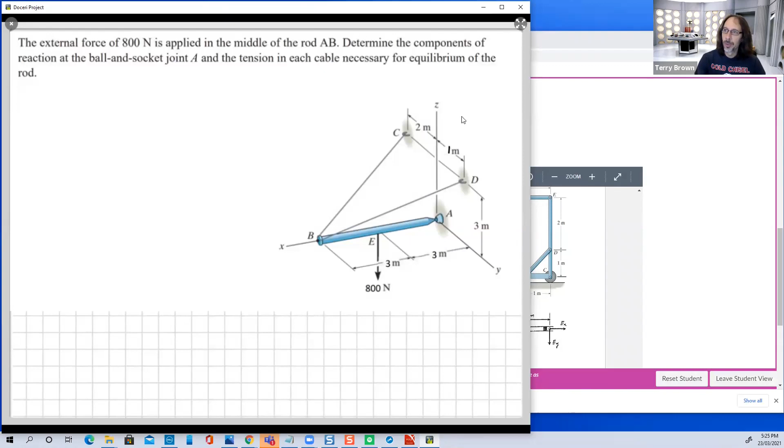All I did was change, where you've got this 1 here, I changed it from a 2 to a 1. Otherwise it was trivially simple.

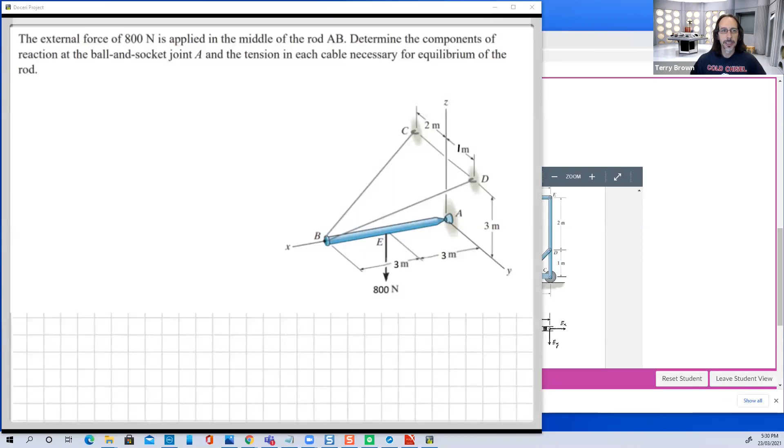Yeah, good thinking. AB a 2-force member? Okay, yeah, Nicholas says it can't be a 2-force member because it has a force applied in the middle. Looking at this, you might be tempted to think it's a 2-force member, but because we've got this force applied in the middle of it, it's not a 2-force member.

If the force was applied out here at B instead of E, if we apply the force out here at B, then yes, it would be a 2-force member, because we would only have forces applied at B and A. But in this case, the force is applied somewhere else.

All right, so I think the other thing was BC and BD being 2-force members. Yeah, these are cables. BC and BD are both cables, so we're going to know the direction of the forces in those cables.

Yeah, so thinking about the reaction forces here, I think we're looking at A. I think it's told that we have a ball and socket joint at A. If we have a ball and socket joint, the thing is free to rotate in any direction around that point, but it can't move away. So no moment reactions at A, but 3 force components.

All right, so what kinds of approaches to solving this problem? It's obviously an equilibrium problem, so we've got to use some equations of equilibrium somewhere. What other things might we be thinking about making use of?

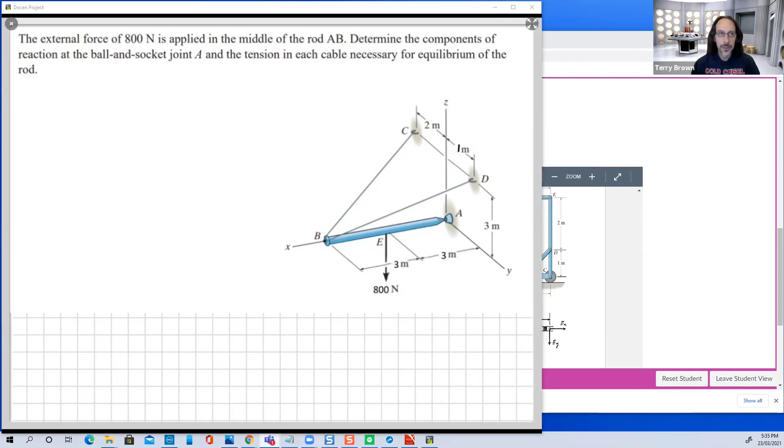And I've posted in Teams, by the way, let's go to Teams, where's Teams? Right here. Moment about y-axis at A. Yeah, that's a good suggestion. I think I did something along those lines.

If we go to general and in post, you can see Fatma's uploaded her solutions to the tutorial problems and also some final exam problems from last year. I've also uploaded my solutions to questions 1 to 5 on Canvas, and I think the original ones that were there were the other tutor Mobarak's solutions.

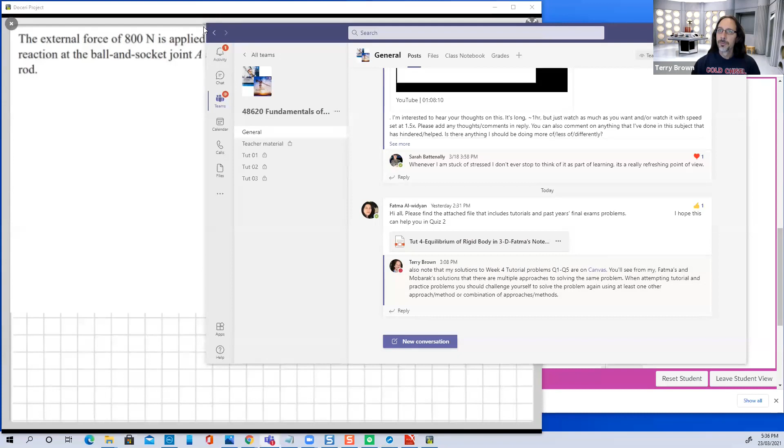And if you look at them, they're all different, all 3 are different, but we all come up with the same answers. So in most problems, there's more than one way to solve them. In those simple 2D equilibrium problems, usually they all take the same form and look pretty much the same: draw a free body diagram, take moments about a point, use the moment equation, then use the two force equations. Most solutions look much the same. When you get to 3D problems, there are many more options for how you solve the problem.

What I've suggested to you here in the Teams chat is whenever you do these problems, try and force yourself to do the problem again using a different method or approach, or using a combination of what you've done and something else.

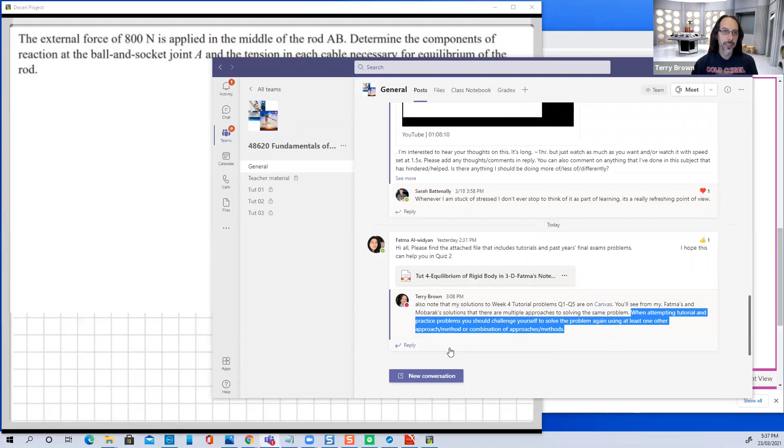Let's see what I've done here. You could do this problem without drawing a free body diagram because it's pretty simple, and a lot of people would draw on the question when doing solutions for quizzes. But if you're doing a problem like this from scratch in a design exercise, then you've got to draw the free body diagram. So please get into the habit of doing that.

I've just drawn my free body diagram there, just for the geometry.

If you're using a pad, like a tablet, iPad, or Surface Pro, one tip is to use the question. I told my tutorial students this: trace over the question, then cut and paste and use that in your solution. In this case it wasn't my drawing, but in a quiz you can save yourself time by drawing a nice free body diagram just by tracing over that.

If you're doing a paper-based exam, I don't have any here, but you can see this grid paper background. Sometimes the graph paper in an A4 grid book is quite thin, so you can lay it over your question and trace over at least the shape of the thing, so you can draw good free body diagrams for yourself.

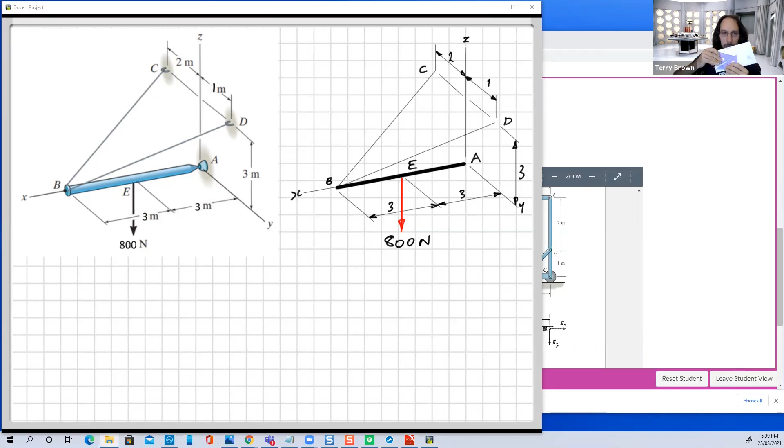The other thing to do, as I showed—it's a bit hard here, I need a white background—if you get yourself a set of set squares like this, you can very quickly draw parallel lines. Draw one, slide this along, draw your next one, slide it along, draw the next. If you have to draw these three lines, and even these lines up here, you can quickly draw them using drawing instruments like this.

It's probably quicker than trying to do them roughly freehand. So the payback in the maybe 30 seconds longer it takes you to draw your lines with this rather than freehand is worth the effort—not only because I give you marks for a good free body diagram, but because it helps you understand and solve the problem better.

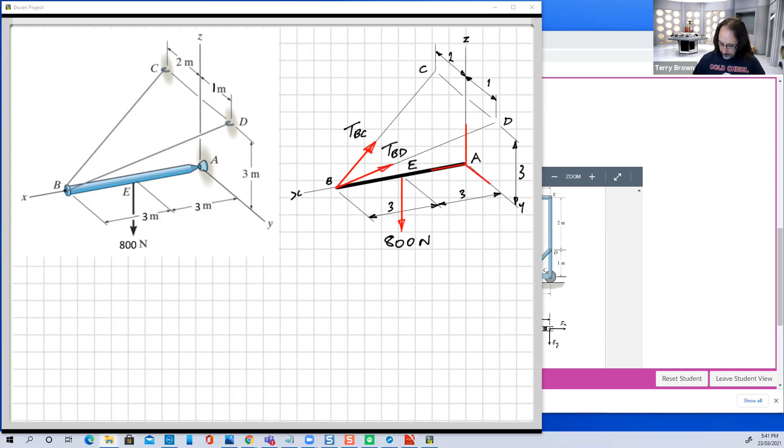So then we said, yeah, we're going to have some forces along these cables. Let's put those in—we don't know what they are, so let's label them TBC and TBD. And at A we've got reactions, and we don't know the directions, so let's assume positive directions, or positive senses, for all of them.

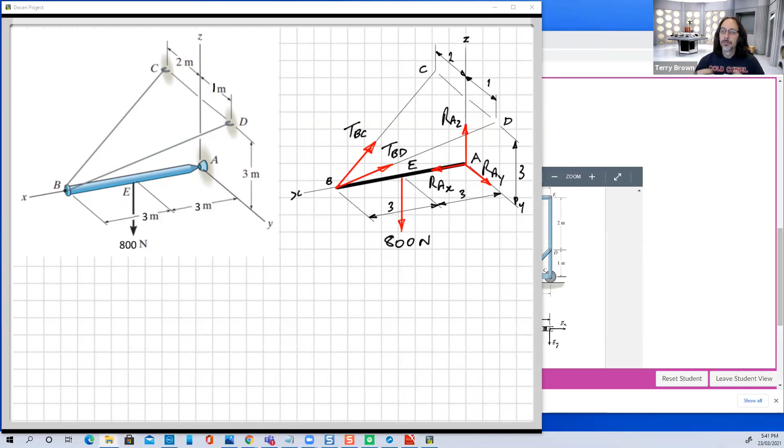Now you've got your free body diagram, you can start launching into equations of equilibrium, or you can try and work out your direction cosines for these angled forces here. But that's in the chat.

Jonathan said: take moment about the y-axis at A. Yeah, let's have a look and see what would happen if we did that.

That's a good suggestion, and I'm pretty sure I did something like that in one of my solutions. What would happen if we do that? How many unknowns will we have in the equation? 1, 2, 3, 4.

If we take the suggestion and take moments about the y-axis through A, how many unknowns are we going to get in that equation? One person says 2, someone says 1. So yeah, we're going to have 2 unknowns, aren't we? Both TBC and TBD will have moment effects about the y-axis through A. So we've got one equation with 2 unknowns—we can't solve for anything yet.

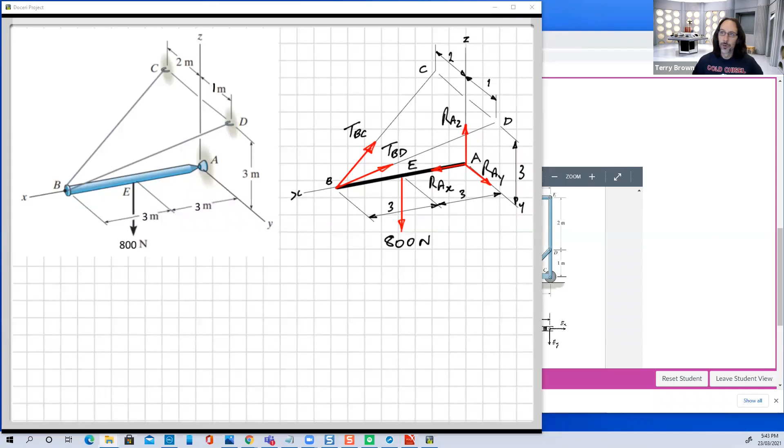That's okay, just go to the next equation. What might we do next? Start looking at force equations, start looking at direction cosines. Let's have a look at what I did—I can't remember which one I did first. So this one I did the direction cosines first. What I did was express these 2 unknown forces using their direction cosines.

Right, anyone need any further clarification or discussion on this? Happy with finding your direction cosines? Okay, so I've got a few questions here.

All right, so let's take a look at, so why is the value negative? Yes, because of their directions, right?

So if we look at, let's take TBC, because that's the one I've done first. So this is the direction that we want, from B to C, okay? So if we're going from B to C, then it will be coordinates of C minus B. So here it's in the X direction, 0 minus 6, so it's minus 6.

The other way to think about it is to just look at the direction of the force, right? So we can see that TBC is going in the negative X direction. So we know that it's going to be in the I direction, it's going to be a minus something times I. So this is just the unit vector in direction of BC multiplied by the magnitude of TBC.

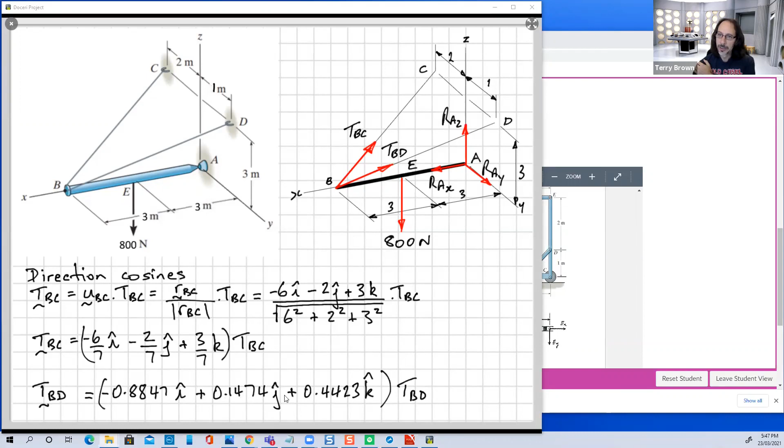So these numbers here, these are just the cosine of the angle between TBD and X. This one's the cosine of the angle between TBD and the y-axis, and so on. So I've just repeated those on the next page for reference.

All right, so now I said, let's take moments about AZ. I could have taken moments about AY, as was suggested. Any idea why I might have taken moments about AZ instead?

So our discussion before was that if we took moments about the y-axis, we're going to have one equation with two unknowns. If I'd taken moments about the y-axis through A, I would have had TBC, TBD, and the 800 Newton force. So my equation that relates TBC to TBD would have included this 800 Newton times 3.

Whereas, because 800 is parallel to Z, when I do this equation, let me put it up for you now, what I end up with is simply TBC is equal to something times TBD. So when I go to my next equation and I have to substitute, I'm thinking ahead — I've got one equation with two unknowns here, and my next equation is probably going to have two unknowns. If it does, then I want to make it easy for me to do the algebra.

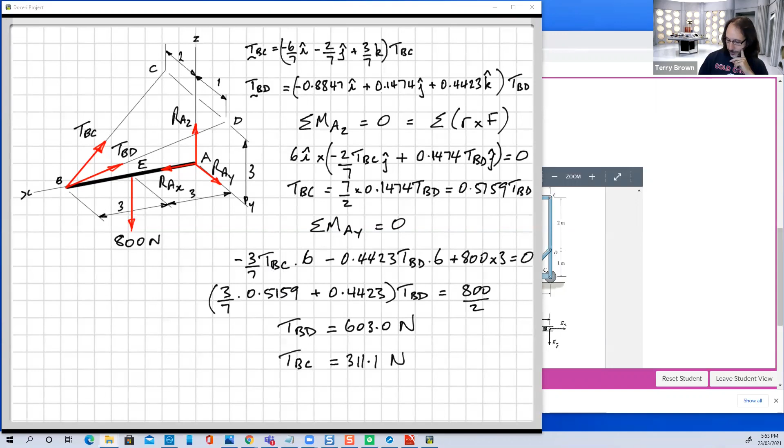So just doing the maths, you can see in this equation where I've got the two unknowns, TBC and TBD. My substitution is really easy - TBC here becomes 0.5159 TBD, and I just shove that in. I can easily do that algebra, and that gets me those two values. And then you can just do the sum of the forces.

So there's my final answers to that one. RAY equals 0. Do these values make sense? Have a look at that and try to think it through, given that we've got RAZ is 400.

So let's do this one just quickly. RAZ is 400, does this make sense? If we take moments about point B here, RAY we found was equal to 0. This force goes through point B, doesn't cause a moment. So we've got 800 times 3, so we're going to need RAZ times 6. So it's going to need to be half of 800, so 400.

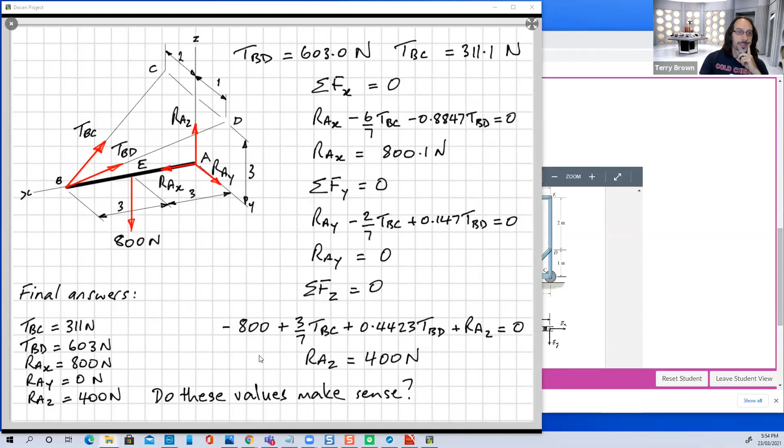So do those kinds of thinkings with your solution. I want to try and get to the alternate solution. If we take moments about point B, z-axis, we can get RAY is equal to 0 straight away.

So the person, if you're not so good at the vector notation and all that stuff, this is my solution. Take moments about B in the Y direction. So here, RAY is 0, so we're left with RAZ. You can find that one straight away.

So for those who aren't strong in the vector mechanics, what you do need to be strong in is a really good understanding of basic moment calculations. Here, I have to take moments about point B, y-axis. The only thing that's going to cause a moment is this 800 and this RAZ.

So now if I do sum of the forces in the Y direction, the Y component of TBC must be equal to the Y component of TBD, because we already found that RAY is 0.

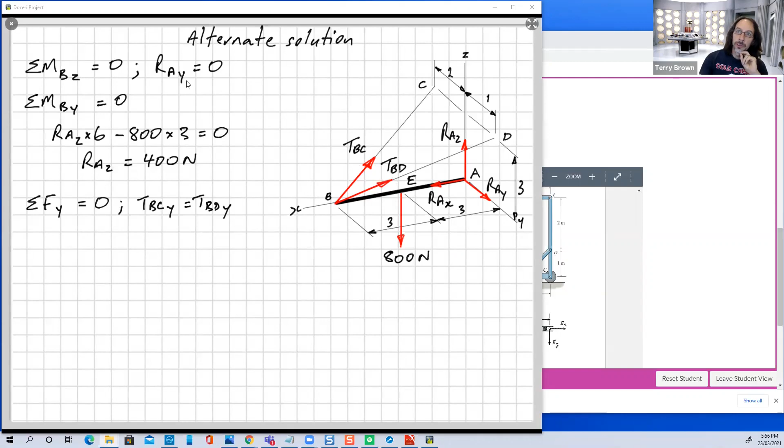Now, I said an easier way to think about the direction cosines is, when we have just a triangle like this, and we say let's do 3, 4. If we have a triangle like that, and that's our force, we know this is 5. How do we know that? Because 3 squared is 9, plus 4 squared is 16, 9 plus 16 is 25, square root of 25 is 5. So that gives us that.

So if we call that F, and along here Fx, what's Fx equal to? Fx is equal to 4 over 5 times F. And Fy will be 3 over 5 times F.

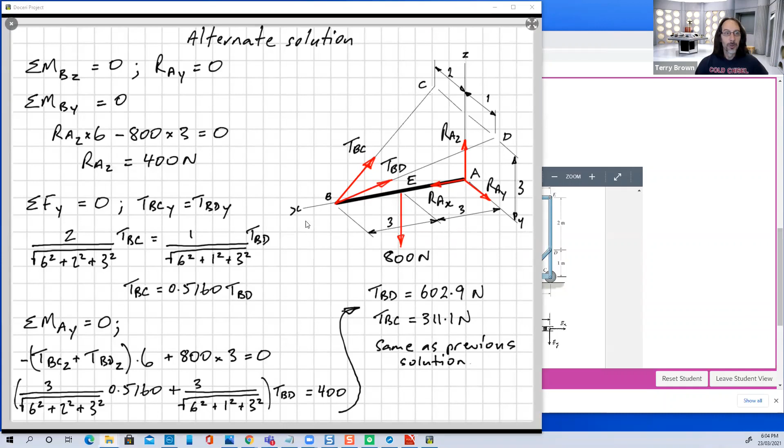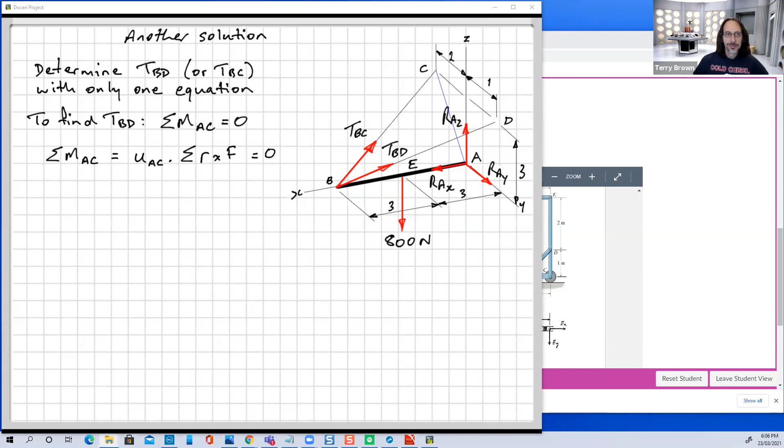But what we can do, if we look at all of our forces here, is notice that all of these 3 forces pass through a point. TBC passes through point C. So if we define an axis from A to C, like that, and take moments about that axis, then we can solve for TBD straight away. Because if we take moments about this axis AC, TBC passes through point C, so that has no moment effect. Our 3 reaction forces down here all pass through that axis, so they have no moment. So all we're left with is 800 and TBD. Sounds simple, then the maths gets messy.

So I'm just going to jump to the end. You need to find the direction vector for AC, so UAC. Then you need to find the position vectors from the force to the axis, and then you need to find the force as a vector. That's what that looks like, and we get TBD, same as before. So that's the clever maths solution method.

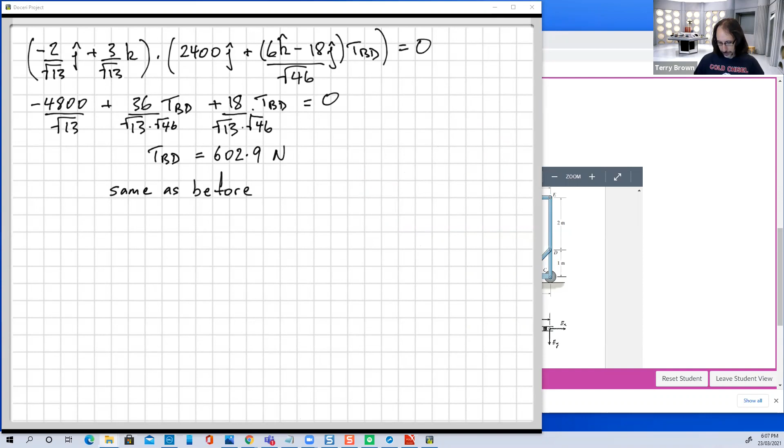All right, I've gone over time. Sorry about that. Hopefully all of that was helpful.